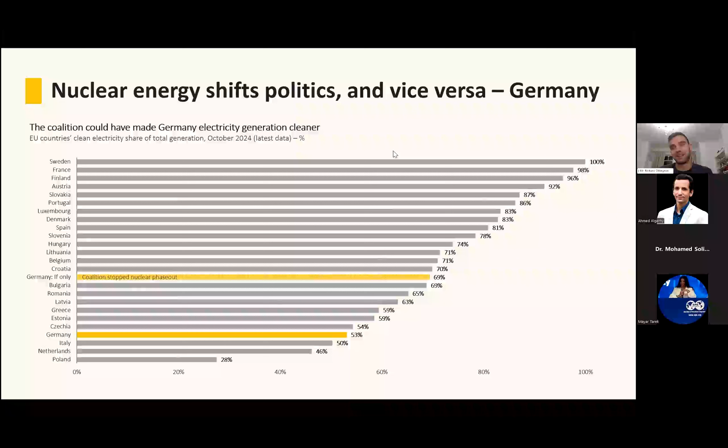On days like today, where in Europe there's a lot of clouds and not much wind, emissions will be very high and electricity prices will be very high. Whereas in France, very steady emissions throughout the year, very steady price throughout the year.

How much did these two energy transitions cost? In today's numbers, Germany has spent maybe 320 billion euros on their energy transition, and their electricity at the moment is roughly 40 euros per megawatt hour at wholesale prices — this is slightly old data, hence the roughly. By contrast, France, taking into account inflation from the 1970s and 80s builds, only spent 130 billion euros. So that's 2 to 3 times less, and their electricity prices are much lower as a result.

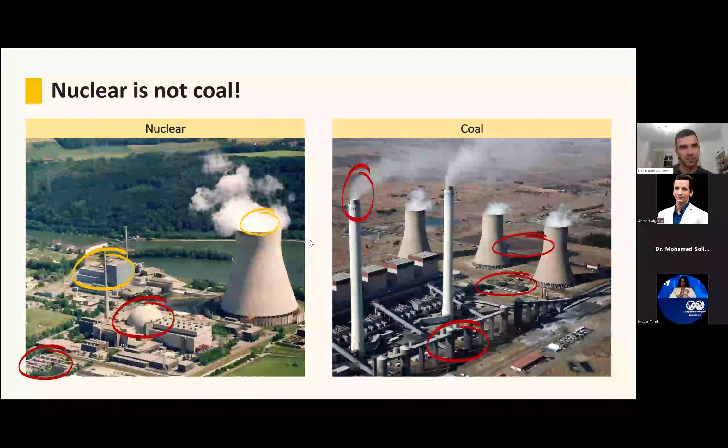So that's a fun game of spot the difference. Now for some more photos. Here's a view of the life cycle of nuclear energy. You start off with raw uranium, which gets mined. Here's a photo of my colleague Mark Nelson in one of the mines - super small mines generate small amounts of uranium, which end up making a huge amount of electricity.

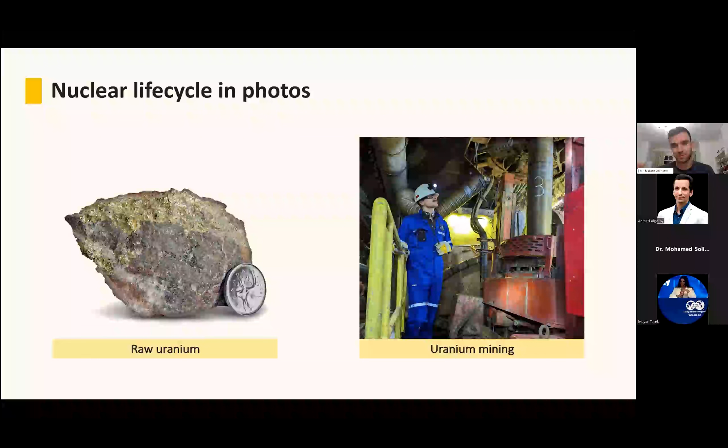That uranium gets mined, then milled, then converted - and this conversion turns the milled uranium into a form that's easy to process. Typically that processing involves enrichment. Not all power plants need enrichment, but most do. Enrichment is basically making sure you've got the spicier uranium-235 at a higher concentration than the typical uranium-238.

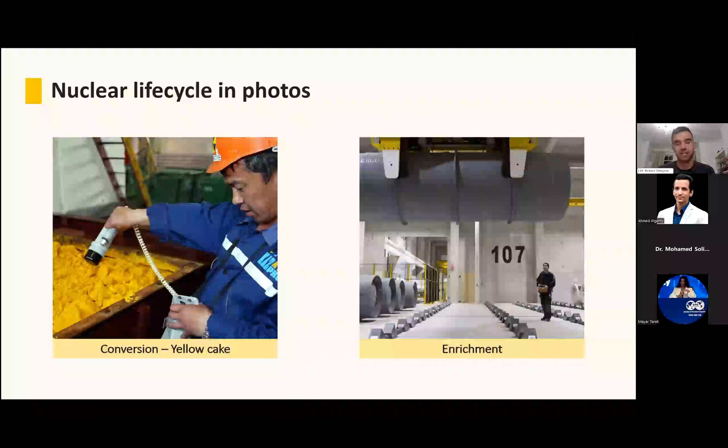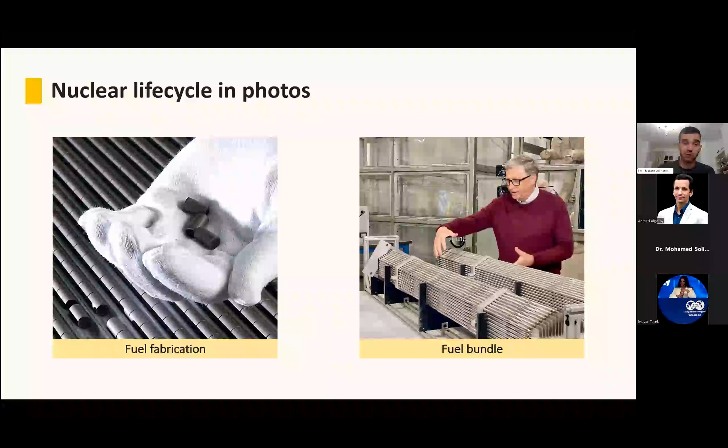That enriched uranium gets put into little pellets, and those pellets go into fuel bundles. Here we've got Bill Gates showing off one of the fuel bundles. Those fuel bundles then go into the reactor pressure vessel, and that's where the magic happens. Fission happens, water starts heating up, and that heated water goes down pipes into the turbine hall, which is where electricity is generated.

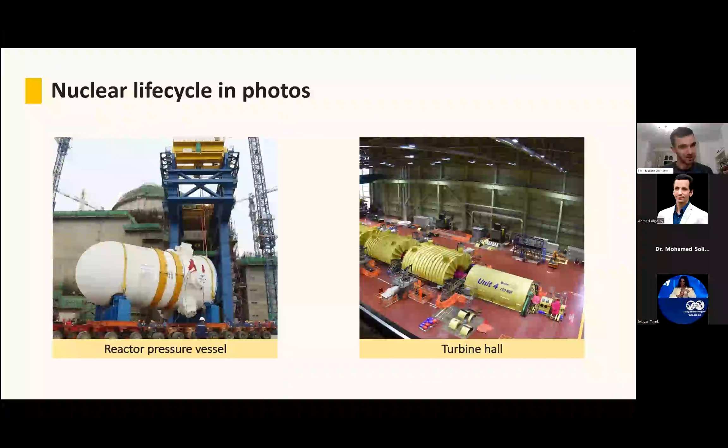All of this is overseen from the control room. It's hard to get many photos of control rooms, as they're often very security sensitive.

Then at the end of the life cycle of nuclear, you've got the spent fuel, or what is commonly known as nuclear waste. You start off by putting that waste into spent fuel pools, often inside the power plant, and it stays there for a couple of years to cool down.

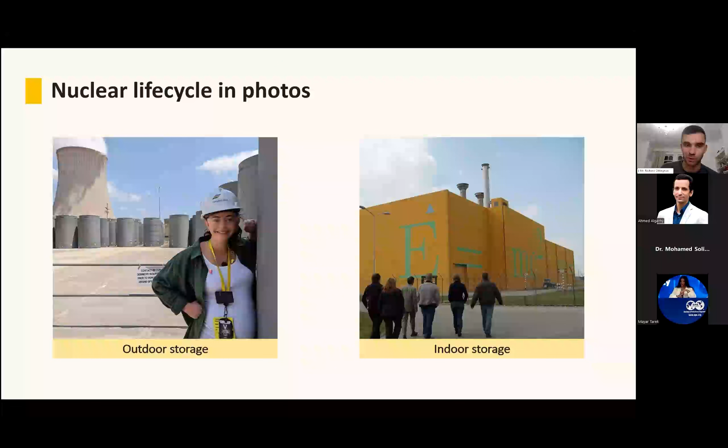Once it's cooled down enough, you've got a whole host of storage options. On one side, my colleague Madi Hilly with her baby visiting an outdoor storage facility in the US. And here's an indoor storage facility down in the Netherlands, which is a great facility. If you're ever in the Netherlands, see if you can visit. They've got a great visitor centre, they're open to school trips, and they're super hospitable for a waste storage facility.

If you want more complex forms of storage, you've got the option of putting it deep underground, as they're doing in Finland, or you can do as in France and recycle your fuel. That's where you take the waste, recycle it, get the good stuff back out, and have much less of the bad stuff to look after. France gets about 10% of their power from recycled fuel, so they're world leaders in that.

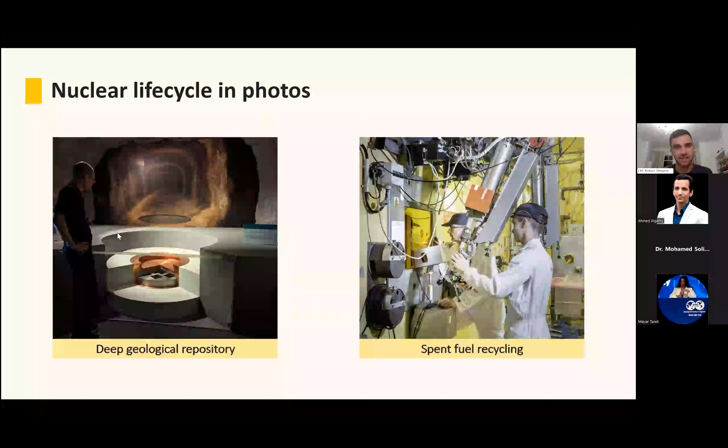So what's nuclear got to offer? Well, in the words of Bill Gates, nuclear power is the only carbon-free energy source that can reliably deliver power day and night through every season, almost anywhere on Earth, that has been proven to work on a large scale.

So quickly, if we go through that: obviously fossil fuels aren't carbon-free. Wind and solar have high intermittency, so they're not reliable in the same way. Usable anywhere? Well, hydropower needs heavy rainfall in hills, and geothermal ideally needs you to be near the Earth's crust.

And proven at scale, for me, this means having a high mix within your grid. Fossil fuels, a lot of countries have 80% plus. Nuclear, we've got France and Slovakia with 60-80% plus nuclear penetration. Hydropower, Iceland and Norway are right up there. Geothermal and biomass are well penetrated in lots of countries. But wind and solar, other than very small countries like Denmark, there's no example of them being the basis of a power system within a country.

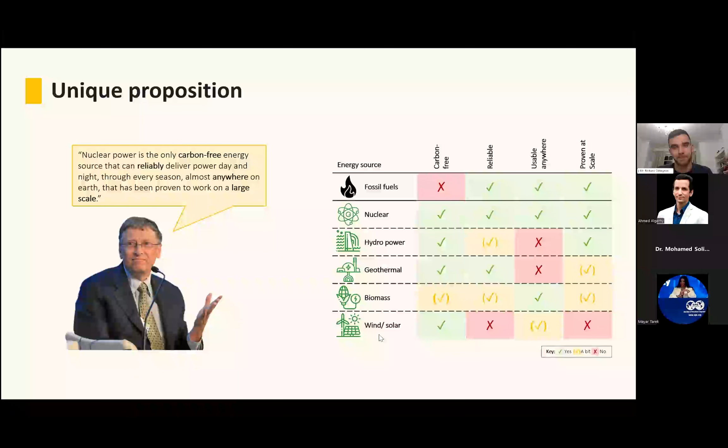Nuclear also offers value beyond just electricity. The electricity nuclear provides is super useful and dispatchable. Nuclear also provides frequency-controlled, voltage-controlled extra grid functions that are of value and often forgotten about. In addition, nuclear power also provides heat, sort of waste heat.

Usually that waste heat just goes back out to sea. In the UK, I was told the sea temperature goes up by 3 degrees centigrade outside a nuclear power plant, and the fish love it - they all come there to spawn. The fishermen also love it for those reasons.

But that heat can also be used for other purposes. In China and a lot of Eastern Europe, they use nuclear heat for district heating. In Switzerland too, and there's also examples of using it for industrial heating - say you've got a paper factory, you can use that heat to dry out the pulp.

Nuclear also has the potential for off-grid power. Already around the world at sea, there are hundreds of nuclear-powered submarines, aircraft carriers, and other Navy ships. In the future, there's a lot of work being done on seeing whether we can get maritime transport to use nuclear power - container ships that at the moment generate 2 to 3% of global emissions, converting them all over to nuclear power.

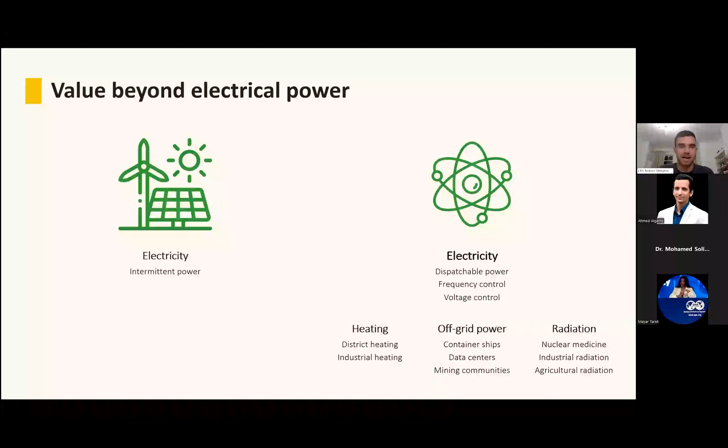People often worry about nuclear safety and the number of people that have passed away from nuclear accidents. What they often forget is that without nuclear, there'd be millions more that wouldn't be saved from cancer and other diseases.

Nuclear by the numbers. Around the world, there are 170 power plants. Those 170 power plants, which if I was a smarter guy I could name all off by heart, there's that few. Those 170 provide 10% of the world's electricity at the moment.

Unfortunately, the amount of electricity from nuclear hasn't grown at all in the past two decades. In that time, some countries have gotten rid of nuclear faster than they needed to, like Germany, Taiwan, Belgium, and Spain is soon to do so, while a few others have built nuclear to make up for those losses. In total, there's only 32 countries using nuclear, and within those, there's 5 key nuclear countries you need to remember: the US, China, France, Russia, and South Korea.

So if we take a step back, don't think about nuclear, think about the size of the prize. In the IEA's, International Energy Agency's, net zero emissions by 2050 scenario, the amount of clean electricity the whole world generates needs to go up by 7 times. And that's a huge amount. In 25 years, we need to septuple the amount of clean electricity we use from our current base. That's going to take a lot of change.

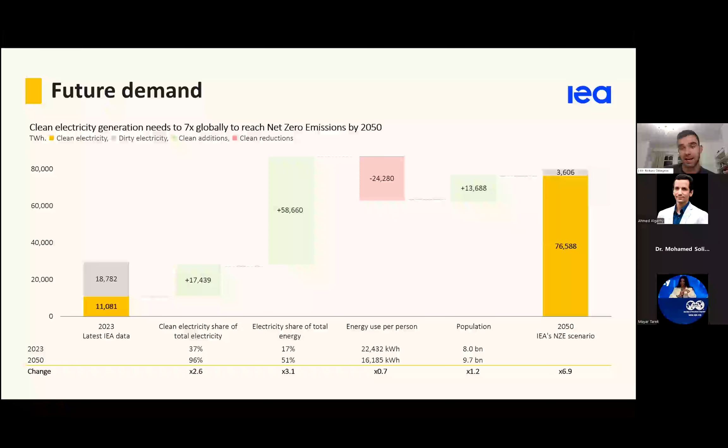And how is that going to be achieved? Well, the IEA says most of it's going to come from solar and wind, but nuclear is going to need to go up by 4,000 terawatt hours, which, given its current position, is a bit over a doubling of nuclear generation. Someone asked earlier about the mix of nuclear. At the moment, nuclear is 9-10% of global electricity. In this IEA scenario, by 2050, it'd make up a similar mix of the 2050 energy mix.

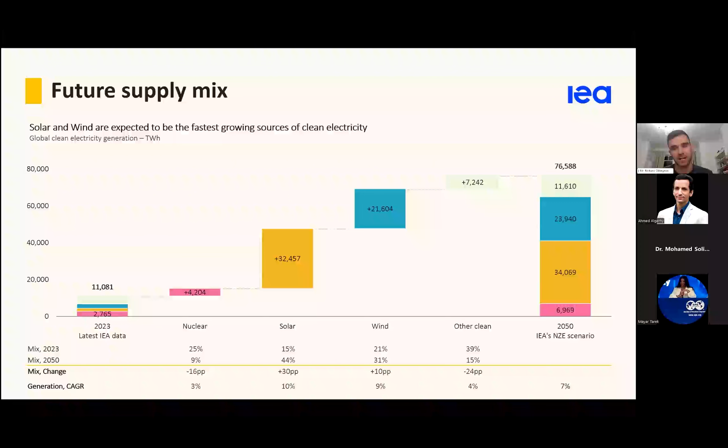Bit of myth busting. So, public support. Yes, nuclear support has been low in the past, but it's on the way up. No, people around nuclear power plants actually do really like their nuclear power plants. In the US, 84% of residents within 10 miles of a nuclear power plant supported its use. Why is that? Well, the nuclear power plant, as I said earlier, has many jobs.

And those jobs are incredibly well paid. Nuclear is the best paid energy compared to wind, solar, oil, gas, coal. Nuclear pays the best jobs. So those communities live a very wealthy, happy life. And then globally, there's 2.5 times more support for more nuclear power plants to be built than existing power plants to be banned. This public support is strongest in developing countries where they're just really keen to get more energy. It's slightly weaker in Japan for obvious reasons, Fukushima, and then Brazil and Spain for more complex reasons. They're less pro-nuclear.

Next myth is around safety. There's the quote out there: 1 death is a tragedy, 1 million is a statistic. Around the world, coal pollution leads to particulates in the air. Those particulates get into your lungs and impact your health. By some metrics, that leads to millions of premature deaths per year from coal power plants. But those don't really get spoken about. What does get spoken about is the nuclear tragedies.

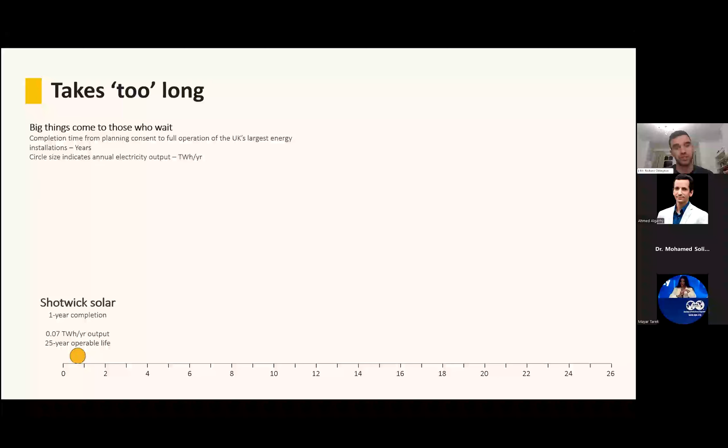Recently, there's been a lot of talk from anti-nuclear people of nuclear taking too long. It can take a long time, but I want to put that into context. So here, what I'm showing is the UK's largest solar farm, Shotwick Solar. This produces 0.07 terawatt hours of power per year.

Hornsea 2 is the UK's largest wind farm, an offshore wind farm. That took 6 years to complete, from planning consent to the first electrons on the grid, and that generates 5 terawatt hours per year of power.

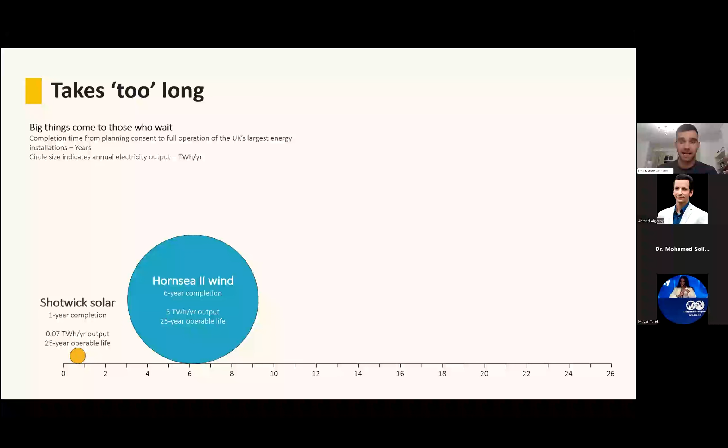Then we've got Hinkley Point C. This has been massively delayed, but should take 18 years to complete, and once it's ready, it'll be generating 25 terawatt hours per year of output.

Typically, a nuclear power plant takes 6 to 8 years, a similar amount of time to get online as a wind farm, but Hinkley Point C is taking a lot longer. If you put these in context, Hinkley Point C will have taken 3 times longer to build than the wind farm, but once it's up and running, it'll be generating 5 times more power. It'll also be generating that power for 3 times more years.

Nuclear power plants are typically designed initially for 60 years, but as we're seeing in America, can be extended to 80 years, 100 years. We'll see how long these power plants go on for. So we like to think of this as big things come to those who wait. It's the energy mix's example of the marshmallow test: do you want one quick, tasty good now, or many more if you wait a bit longer?

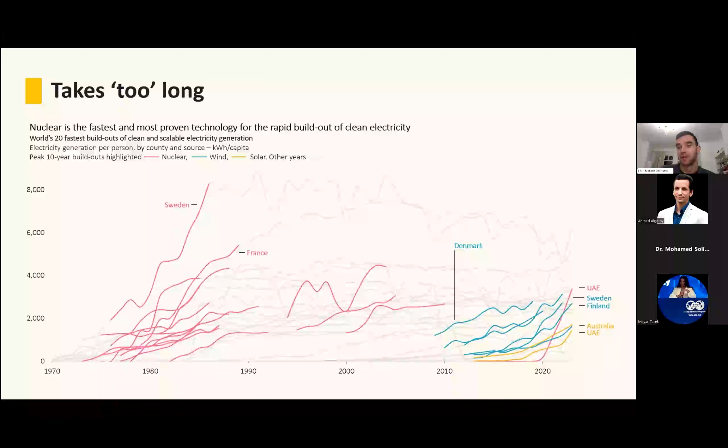But more recently, there's been a few great examples. So the UAE recently commissioned their 4 units at Barakah, and that has instantly made them able to leapfrog every other country's energy transition. Their nuclear power plant has added more clean electricity per person than every Danish wind farm, every Swedish wind farm, or every Australian solar farm.

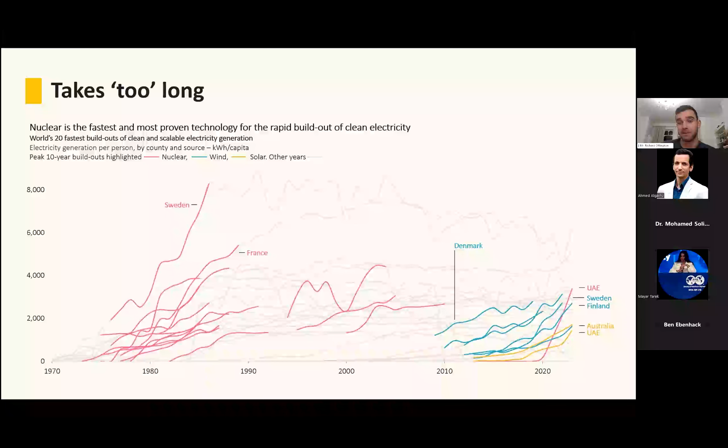What's also great to see is UAE features twice here. The Emirate state doesn't just focus on nuclear, it focuses on all the clean energies, and it's doing a good job. It's added a lot of solar, which is super important given their need for air conditioning during the sunny days.

First off, China. China is the mega builder. They build over half of the world's power plants at the moment, and they're expecting to increase the amount they build. The rest of the world is looking on and thinking, damn, these guys are really good. It's probably about time that we catch up.

You might not be able to see, but today I'm wearing my t-shirt from a nuclear company. It's a US nuclear project developer that wants to build 6 nuclear reactors. If you go on their website, which I strongly recommend, they've got great content there. They focus a lot of their messaging around the need for America to catch up with China. It's not okay for China to be leading the clean energy transition and for others to be waiting around. It's time for America to step up its game.

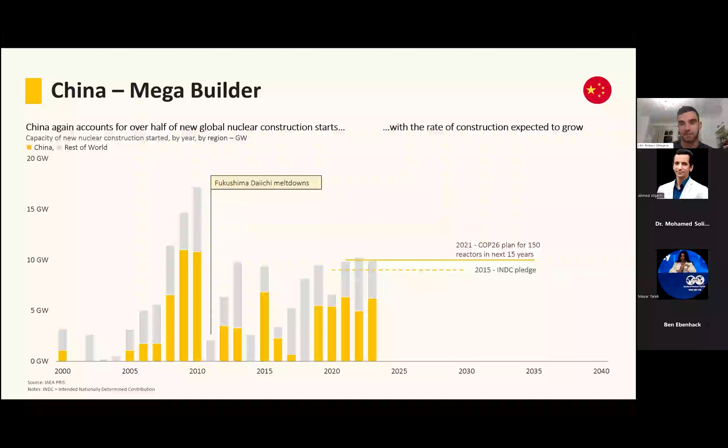Next is Russia. They are the leaders on nuclear exports. At the moment, they export the vast majority of nuclear power plants. They're building in Turkey, Egypt, Bangladesh, and Belarus was the other one they've recently exported to. And they very much plan on continuing that export.

They're constantly in conversation with African countries and making really good sales pitches there, looking to sign deals and build nuclear power plants. That's great for the climate. The rest of the world needs to think geopolitically - do they want a stake in those geopolitical ties? Because when you build a power plant in a country, for 60 years your two countries are going to be tied together, working side by side. That's a great geopolitical strength for Russia, and maybe it's time for the West to also start building those geopolitical ties, return to a world of globalization.

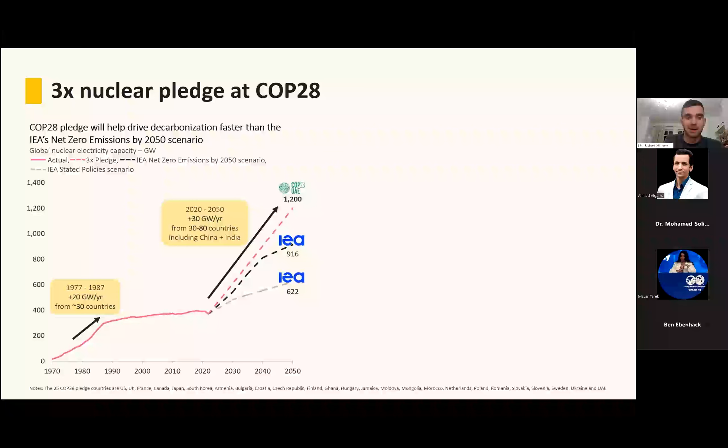Is it deliverable? If you look back at the 70s and 80s, in those heydays, over 10 years, we averaged 20 gigawatts per year being built from 30 countries. There's good reason to think that over these next 25 years, there'll be more countries building nuclear, and therefore being able to average 30 gigawatts per year should be doable. Back in the 70s and 80s, we didn't have China and India building, or definitely not building as fast as they are building now.

So that's what the future holds for nuclear. Before we go on to questions and answers, there's a chance you won't get your question answered.